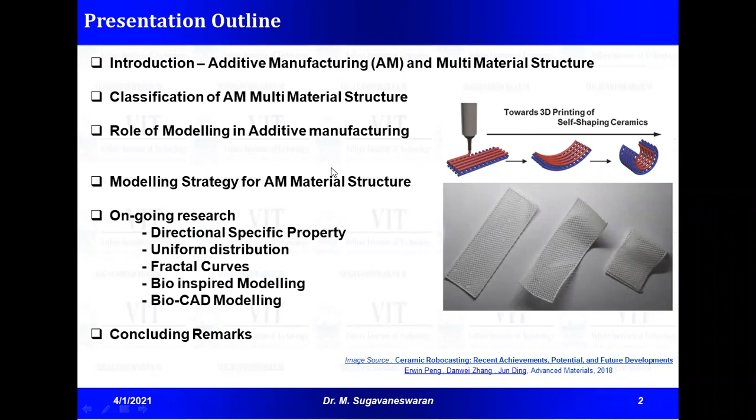So we had many sessions on additive manufacturing. The process is one among the different manufacturing processes which converts a raw material into a desired shape. Most of the traditional manufacturing processes depend on tooling. If we take a formative, subtractive, or additive process, the tooling is a basic component. If we want to change a shape, if we want to change a material, the tooling plays a major role. The tooling could be a mold or die in formative process, tool insert in subtractive process, jigs and fixtures in joining process. This restricts a lot in terms of development of new products, development of new designs.

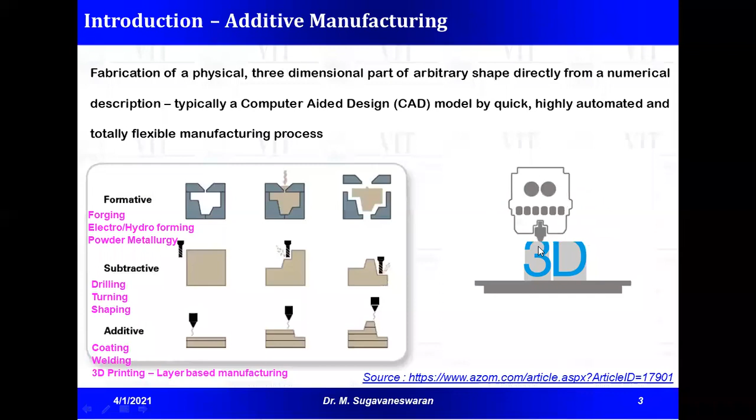This paves a way for another category of manufacturing process, which is independent of tooling activity. One among that is additive manufacturing. As we can see from this animation, we could be able to demonstrate new models without the dependency of tooling activity. And apart from the independence in terms of tooling, we also have the advantage of least wastage because of the additive process, and the process is rapid response to new design. If there is a change in design, the response to the new design is good in additive manufacturing compared to subtractive manufacturing process. But still, there are a few restrictions.

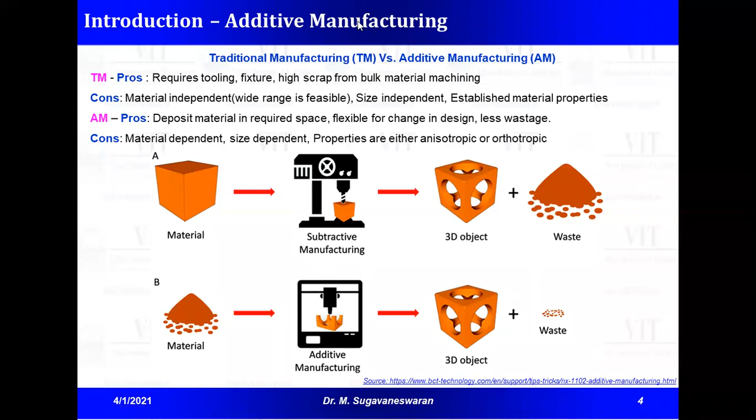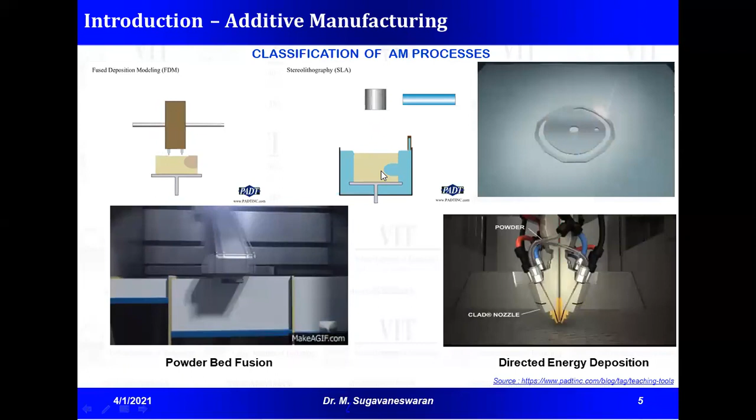But considering this advantage, suitable applications can be explored. Among the additive manufacturing processes, we have different varieties. Few are powder based, few are filament based, some are resin based, some are sheet based. ASTM standards have classified this process into 7 major categories, and these categories are based on the principle in which the materials are joined and also the raw material form.

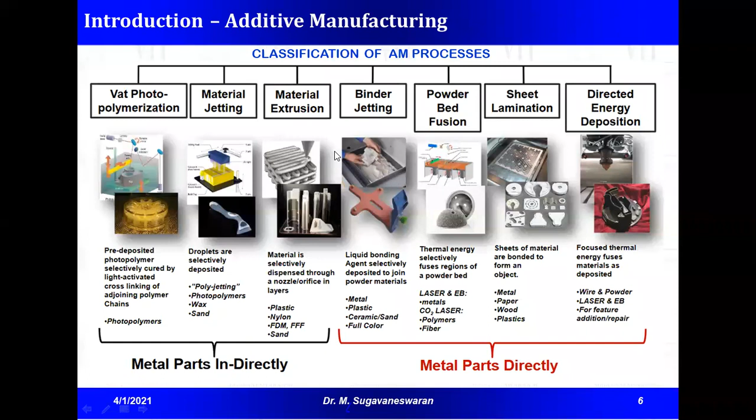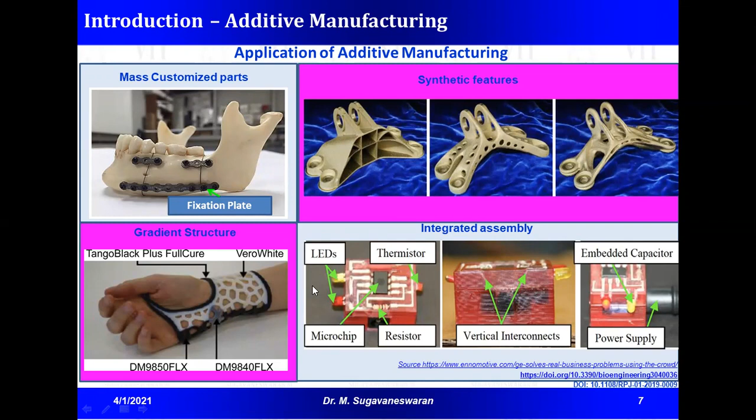So based on this category, we could able to see different processes in the market. And this additive manufacturing process is mostly used for complex, customized, integrated gradient structures. A few examples of additive manufactured components are displayed in this slide. It doesn't mean that these parts are not feasible in traditional manufacturing, but it is difficult to manufacture in traditional manufacturing. Some of the best examples are customized components, synthetic feature components, complex components. This example is complex, customized, with material gradient, and integration of multiple functionality in a single component. So these are some of the well-known applications in commercial aspects, the requirement of additive manufacturing process.

If we look into the multi-material structure, the multi-material structures are majorly classified into two categories: graded type multi-material structure and discrete type multi-material structure. In graded type, the material from one behavior to another behavior will vary gradually. Whereas in discrete type, we could include the secondary material into the primary material in terms of fibers or particulate or flakes. So within the discrete type, we can go for laminated, woven, isotropic, two-dimensional reinforcement, one-dimensional reinforcement.

The fiber can be based on the L by D ratio. It can be a particulate, whisker, or laminate composite.

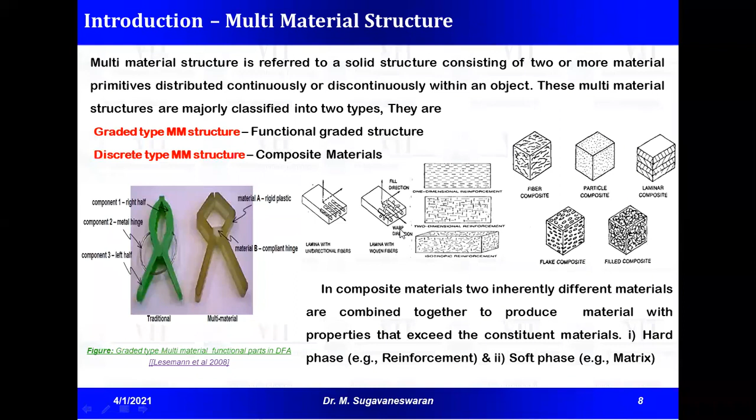Based on the functionality, we are using the multi-material structure in our application. This multi-material structure, apart from composites, the other multi-material structures like graded structures are generally obtained through following processes like mingling of two materials, coating, sandwiching one over another, impregnation, or intermixing the consolidated component, sometimes by using heat and pressure. These are traditionally done through molding, welding, powder metallurgy, coating, and additive manufacturing process.

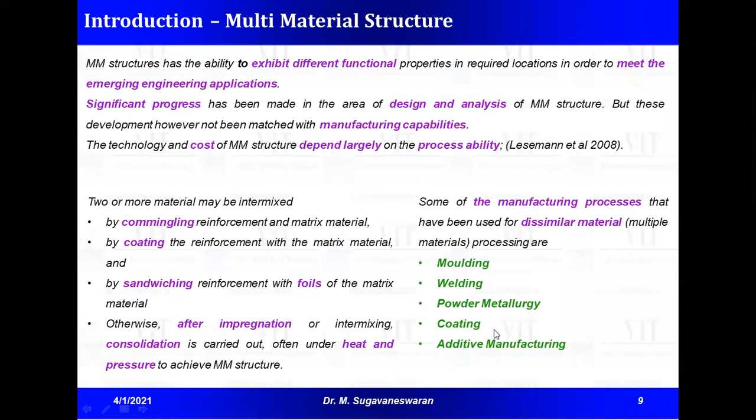In this presentation, my focus would be more on how graded or discrete type additive manufactured structures are made through additive manufacturing process. If we speak specifically to additive manufacturing, the multi-material structures are obtained through additive manufacturing in all three categories: graded type, blended, and infiltrated materials.

In graded type, you can vary the material from one pixel to another pixel, from one layer to another layer. Blended type, material will deposit where the raw material itself is pre-mixed, that is one primary material with a secondary material. In certain cases, it will be infiltrated.

Scaffold or cellular structure will be fabricated using a single material, and this structure and density of the cell is based on the impregnation process what we are going to use and the performance what we are expecting. So either through infiltrating medium, we could make additive manufactured multi-material structure, or through pre-mix condition, we could make additive manufactured structure. In graded structure, that is pixel by pixel, we could control the material deposition.

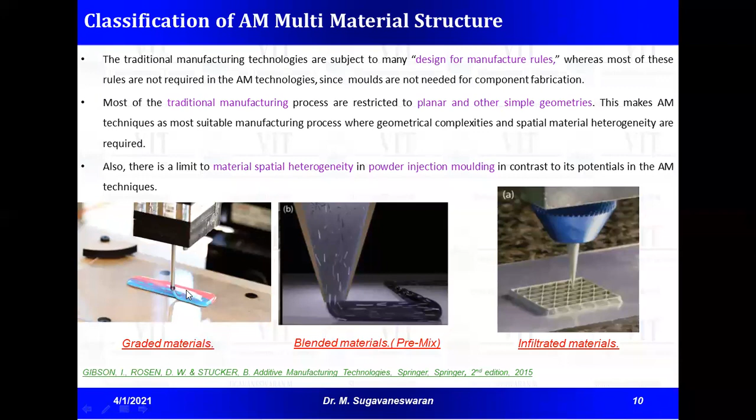This paves a new way of development called mesostructure. Generally, the performance of material is based on the processing condition and its microstructure, whereas in additive manufacturing, the structure can be controlled. If it is in a multi-material condition, the position and orientation of different materials can also be controlled in specific topology, and this topology can be designed in such a way as to obtain a specific property.

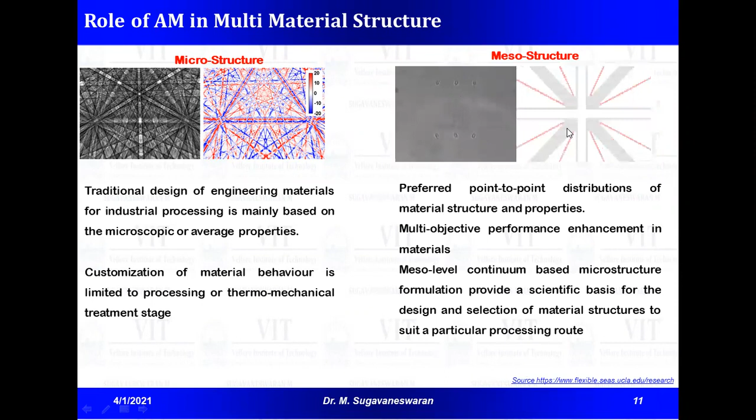So these are some examples of mesostructure, which is very flexible to be manufactured through additive manufacturing process. If we look into the existing literature, as I have mentioned earlier, in all additive manufacturing processes, in all categories like photopolymer, material extrusion, powder bed fusion, DED, sheet lamination, material jetting, binder jetting, through any one of the ways like pre-mix condition, graded condition, or infiltrated condition, the feasibility of achieving multi-material is there, and certain processes have restrictions in terms of material: ceramics, metal, and polymers.

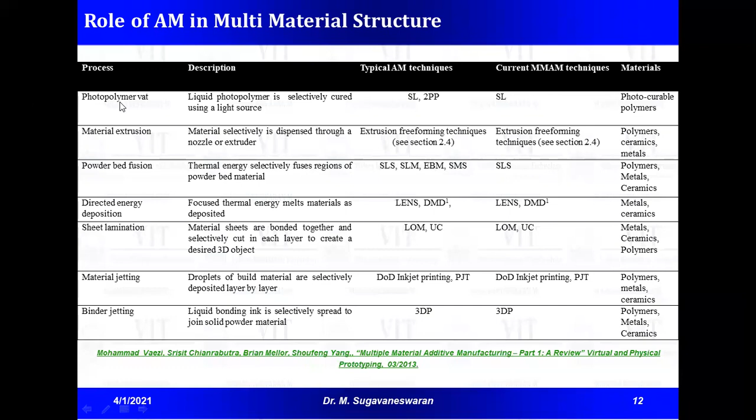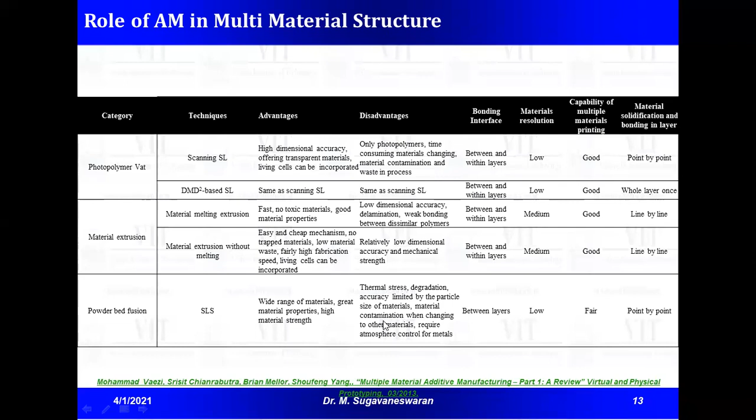If we look into the photopolymer, it is mostly restricted to photocurable polymers. Among these 7 categories, each process has its own advantage and limitation. For example, VAT polymerization is good in accuracy, but it is a time-consuming process, and you have less variety of material. Material extrusion is fast, but dimensional accuracy is not as high as compared to photopolymer VAT. Powder bed fusion, you have a wide variety of material, but there is a restriction in terms of thermal stress, residual stress, and material constraints.

From this, we could observe that by selecting a suitable modeling technique as per our requirement, we could achieve the desired material in the desired pixel. So that is the objective of this presentation.

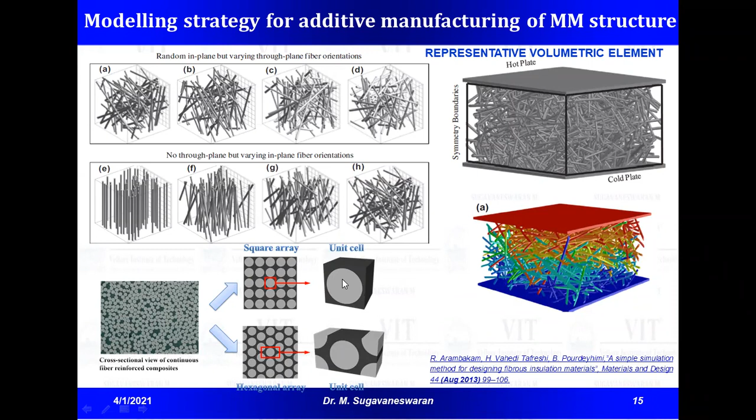Example is shown here. It could be a random generation or based on the external loading, RVE can be repeated in a 2-directional or 3-directional manner. Based on this input, I would like to share some of the research works which we are doing in our lab with respect to modeling for additive manufacturing process, especially with respect to multi-material structure.

So here we are working on fractal curves, fractal surfaces for electronics printing, and also a few applications which require high surface area in a given domain. Bio-inspired structures, modeling of material based on programming, CAD programming — positioning and orientation of secondary material and primary material based on CAD programming. Development of cellular structure, it could be analytical feature-based cellular structure or synthetic structure like gyroid, or nature-inspired structure for bio application, as well as for compressive behavior, toughness behavior, mechanical characterization. We are developing a few structures and testing them for their performance. These are some of the areas which we are working on in our lab.

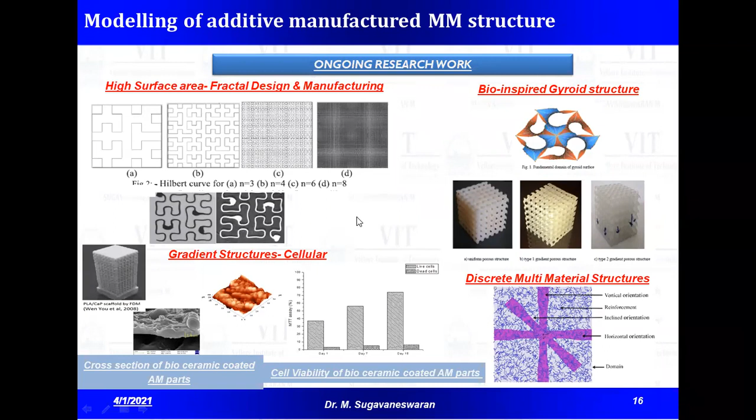The next few slides, we would like to share some of our work with respect to this area. The first one is positioning and orientation of secondary material into the primary material. As I mentioned initially, when we mix two different materials, it can be in a different way — it can be a graded one or a discrete one. Within discrete, we have options for one-directional, two-directional; it could be particulate or fibrous. In this case, we have demonstrated the modeling capability of developing uniformly distributed secondary material into the primary material.

To demonstrate that, a known volume is taken — a square shape known volume is taken with some thickness, and within this volume, the percentage of secondary material required is calculated. Based on the volume and percentage of secondary material, the number of reinforcements, that is number of secondary material, to be generated within a given volume is calculated. This requires two inputs: the first input is volumetric percentage and domain of the volume, and the second one is volume of individual reinforcement.

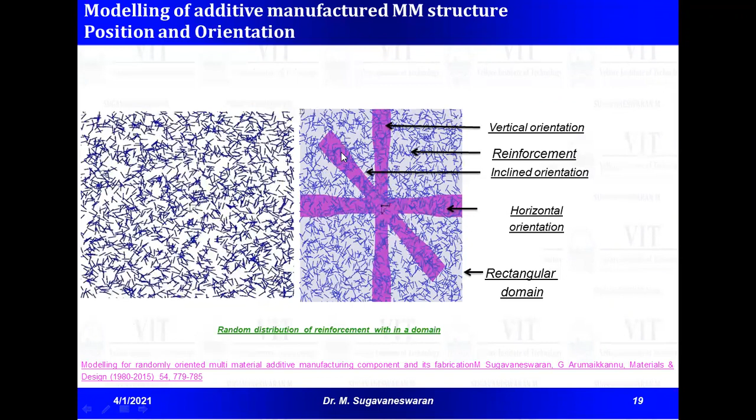...are individually fabricated using a Stratasys Polyjet process, which supports multi-material printing. If we look into the distribution, here I have displayed the distribution of the reinforcement angle, because...

...the randomness of the reinforcement is calculated based on the angle. So for the full 360 degrees...

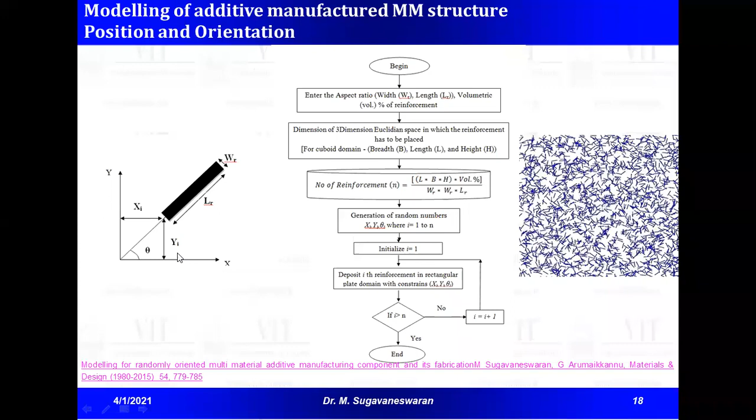...for each 30-degree interval, the number of reinforcements generated is plotted. The mean value is calculated based on the number of reinforcements, and based on this mean, the normal curve is also...

...drawn. So 90 percent of it falls within the 2-sigma level, and it still depends on the random method we are using. In this case, we used the method available in VB script.

Based on this randomness method, the reinforcement is generated randomly, and the distribution falls within the 3-sigma level.

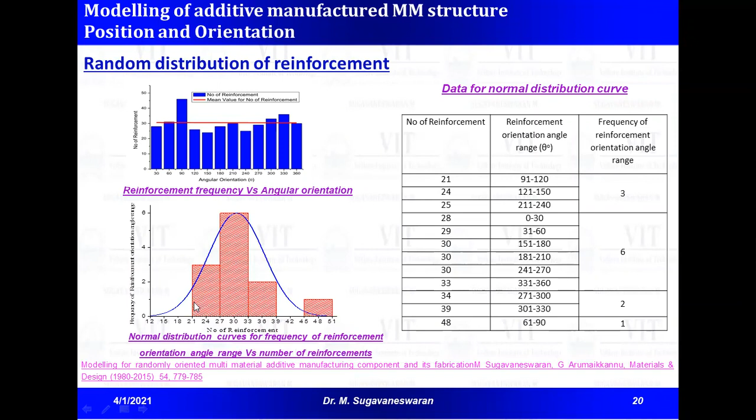...ultimate strength, but if we look at the behavior of the material, it is almost constant. Though we generated the reinforcement randomly, the uniformity is maintained only at the end, because it depends on the crack propagation region and how the reinforcement is positioned with respect to that region.

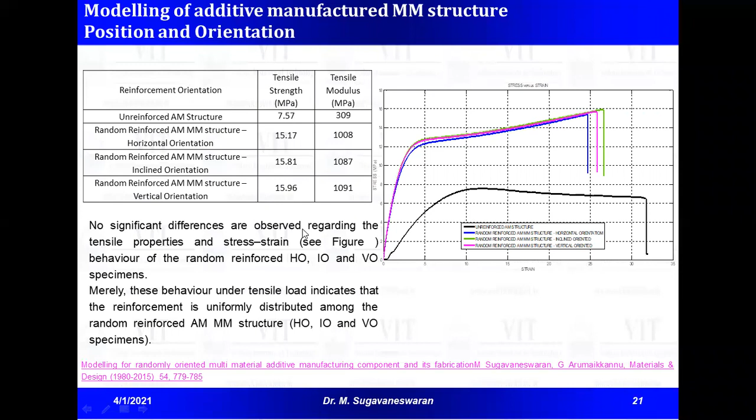So that is about the positioning and orientation of secondary material with primary material based on CAD programming.

We have also tried to place secondary material within the primary material based on different loading conditions. For this, we took a reference from classical lamination theory, which is generally used for composite materials.

If we look into the composite material, the positioning and layup sequence help us understand the behavior of the material, whether it has bending resistance, twisting resistance, or superior strength at the outermost layer.

This can be designed using the CLT relation, the classical lamination theory relation. Based on this relationship, the A matrix represents axial loading, the D matrix represents moment, and the B matrix represents the coupling between axial and moment.

Certain terms in this ABD matrix can be made zero, and with certain layup sequences, we could also achieve symmetric conditions in the laminate. That is, above the mid-axis and below the mid-axis, we could achieve a symmetric condition.

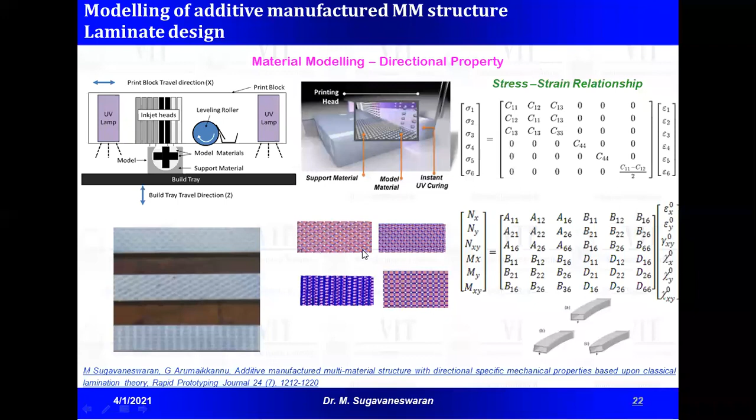Based on this CLT relationship, the secondary material is designed into the primary material, and this structure, as well as the previous structure I discussed, is fabricated through a polyjet three-dimensional printing process from Stratasys, which deposits a droplet of photopolymer that is cured immediately with a UV lamp, layer by layer, using an inkjet ejection mechanism to eject multiple materials within a layer. That is one uniqueness of this process.

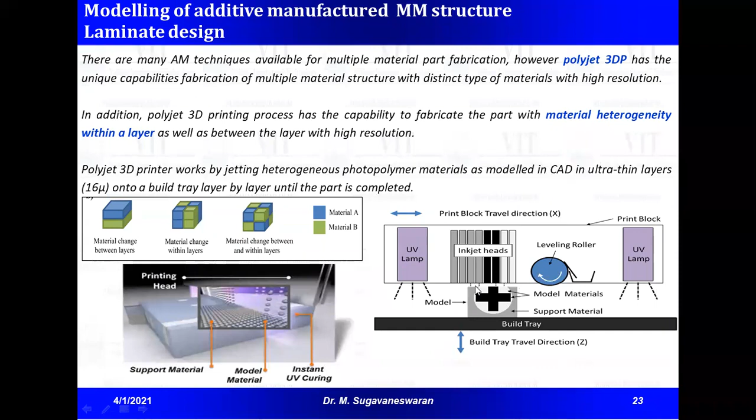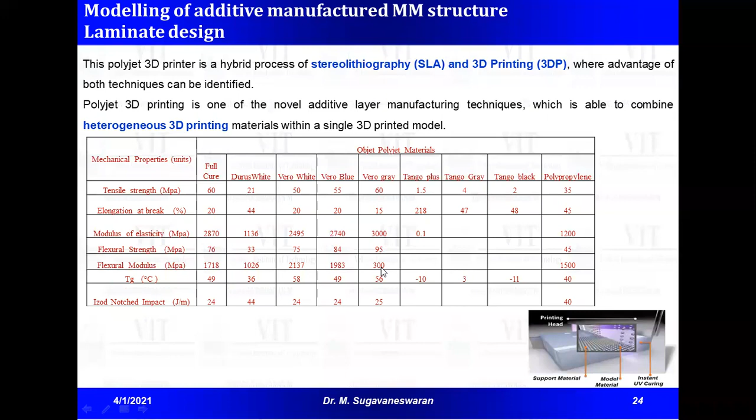Based on the CLT relationship, a few stacking sequences are considered. The first one is unidirectional. All three categories are unidirectional, but in longitudinal condition. 3 represents 3 layers, and S represents symmetric of 3, so totally 6 layers. Above the axis it is 3, below the axis it is 3.

And 45, where all the secondary material is placed with the primary material at 45-degree inclination. 90 is where the reinforcement is placed at 90 degrees in all 6 layers.

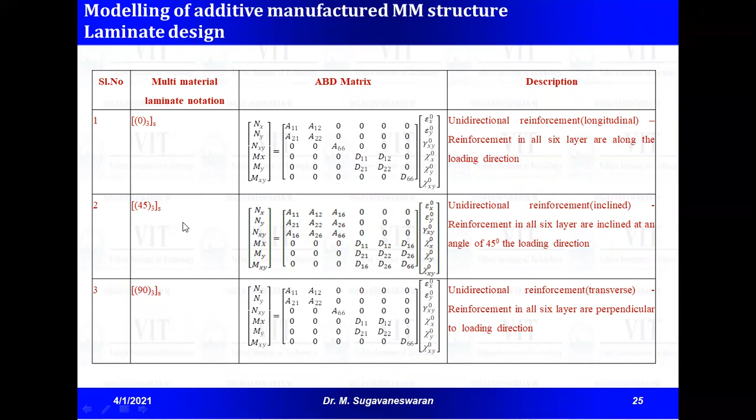That is bidirectional - from one layer to another layer you have a variable orientation. In the previous case, all layers had the same orientation of secondary material. Whereas in bidirectional, within each layer we could change the direction.

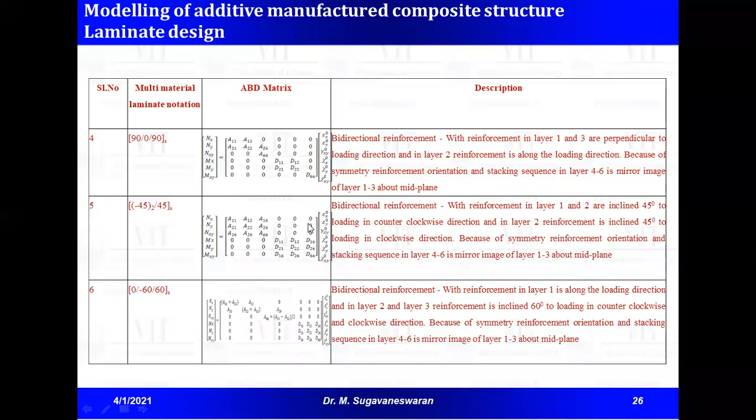Again, the relationship is displayed in this CLT equation. The last one is quasi-isotropic, where we could achieve a transversely isotropic condition. The CLT guidelines help us design the secondary material from a primary material through a CAD model.

The unidirectional component stress strain behavior is shown here. It is known that in tensile loading, if the reinforcement - the high strength material - is along the loading direction, we get the best strength. But in the transverse direction, there is delamination which occurs along the matrix.

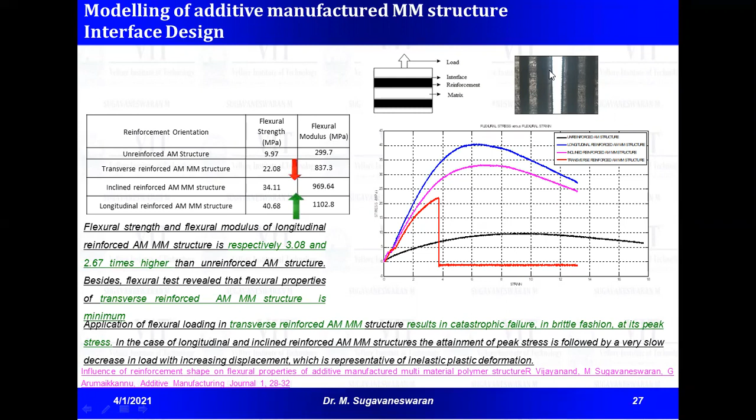If we look into the fractured specimen, we can observe that the load doesn't get transferred to the high strength material. The reason is, as we print a component layer by layer, between the layers we have a weak interface - that is most common in any additively manufactured component. Along the z-axis, the strength will be less, and this results in catastrophic failure in the transverse condition case. But later, I would like to show an interesting result of how we have eliminated or improved this behavior in the unidirectional case.

In the multidirectional case, twisting - that is, in-plane and out-of-plane curvature, in-plane deformation and out-of-plane deformation - can be controlled by proper alignment of the secondary material within the primary material. So twisting, bending, or a combination of twisting and bending, can be controlled by choosing a proper alignment of the secondary material within the primary material.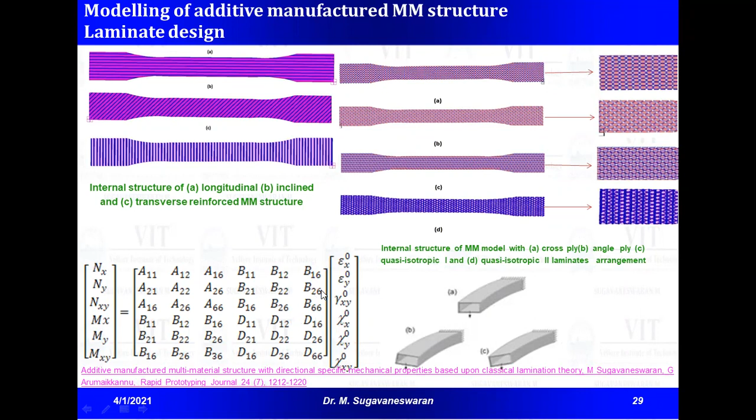If we look into the fractured region of two bidirectional laminates, on top it is cross ply, and on the bottom it is quasi-isotropic condition. We could observe 6 layers - the top 3 layers and the bottom 3 layers.

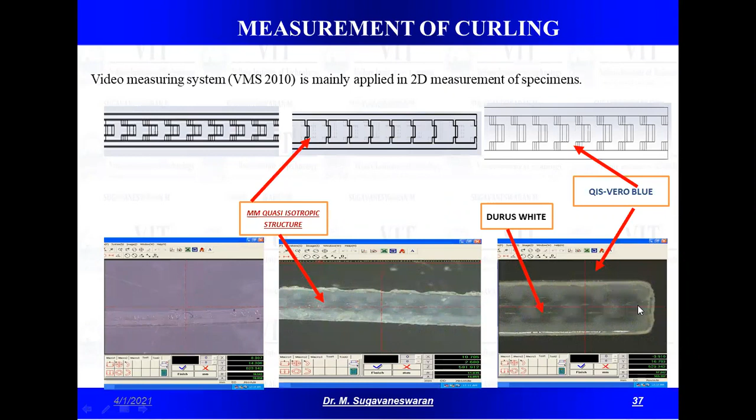This is a printed component of thin feature based on quasi-isotropic condition. In the enlarged image, we could see the multi-material condition. The dimensional combination shown here includes different width, length, and thickness combinations for the purpose of experimentation. We could observe in-plane distortion as well as out-of-plane distortion.

As we have a specific property, since we are designing the material with a specific orientation, the comparison between the multi-material structure - though it is not an optimized one, we have taken directly the quasi-isotropic - is not varied, because at the bottom the Young's modulus is different from the top. So if we look into the curling behavior of thin features, though it is not an optimized condition, with the help of quasi-isotropic, which has high resistance to bending at the top and bottommost layer, that is what we observed even in finite element analysis.

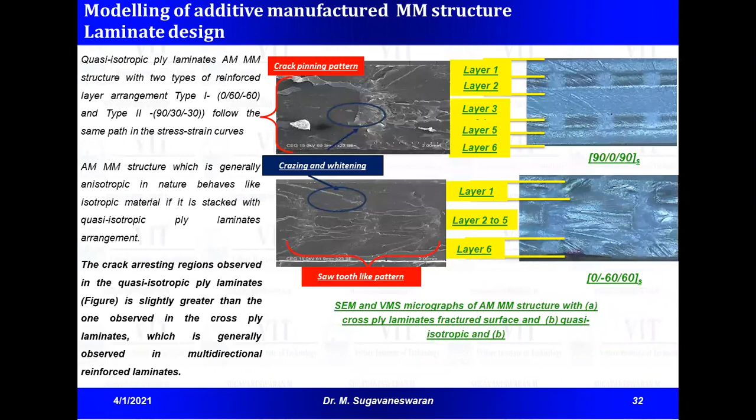As we look into the ply-wise stress behavior of a material with respect to thickness, the quasi-isotropic condition has high strength and high resistance to bending load. This is for a bending load condition. In quasi-isotropic condition, the resistance is more at the outermost layer. These three graphs show the stress behavior across the thickness for a bending load condition.

The first graph is for angle ply, the second one is for cross ply, and the third one is for quasi-isotropic ply. As I mentioned, the blue color line represents shear load. In cross ply laminate, we do not have coupling, so the shear load is completely zero.

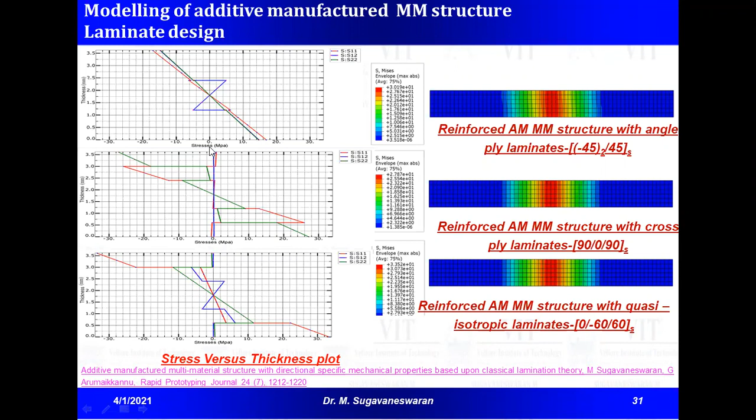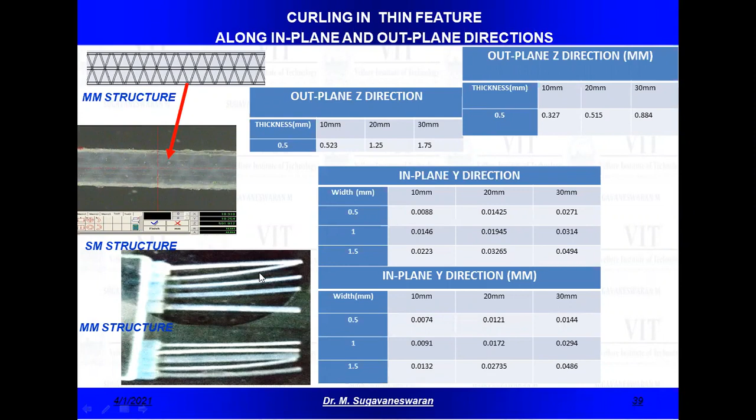So now we are further working on calculating, through an analytical method, the individual elastic modulus of a layer, and accordingly varying the composition of primary material and secondary material across the thickness to control the distortion. This anti-curling behavior has to be implemented so that even after removal of the component, it maintains the proper position without any deformation.

So this type of structure will play a major role, especially in compliant mechanism. Nowadays we are seeing a lot of application of additive manufacturing in compliant mechanism, topology optimization, thin structure, and cellular structure fabrication. So we believe that optimizing the material distribution from bottom to top based on the variable elastic modulus, we could restrict the distortion in thin features.

So this is one example of a thin feature, a turbine blade component, where once it gets removed from support, it tends to curl automatically because of heterogeneous behavior.

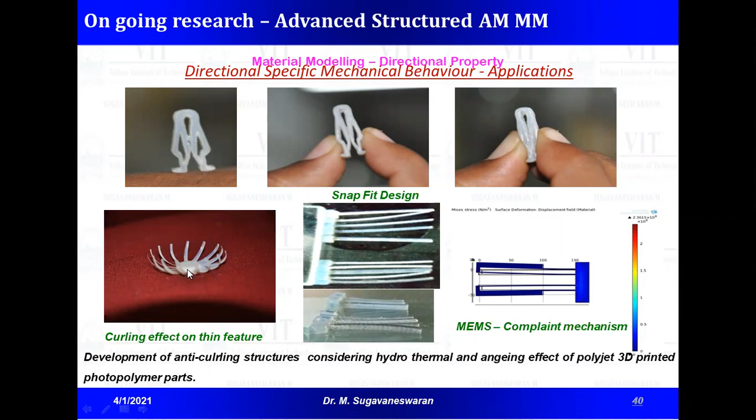The other part of the presentation is, as I have mentioned earlier, in transverse loading we could see that the load doesn't get transferred from the matrix, the softer material, to the harder material, right?

So as we are designing from CAD, we took advantage of mechanical bonding, and the interface between the primary structure with respect to the secondary structure is redesigned. Instead of a planar interface, it is redesigned with a corrugated interface, as we observe from nature. So the planar interface is redesigned into a corrugated interface, and this is subjected to bending.

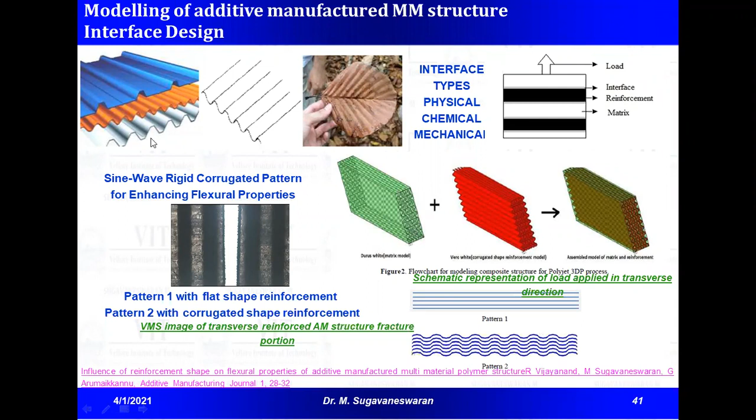Whatever image is displayed here is a failure of a component in transverse loading. So as corrugated structures are advisable for bending loading, the planar interface is redesigned with a corrugated interface, and this was printed using the same PolyJet three-dimensional printing machine.

The stress-strain behavior of three combinations: first without the secondary material, only with the primary material, the maximum strength is around nearby 10 megapascal.

Whereas if we go for mixing primary material with secondary material, there are 6 layers. As it is subjected to bending load, we could observe the peaks, that is layer by layer fracture of all 6 layers, and this strength is less than the strength we observe for pure virgin material.

Whereas in the corrugated structure, we could achieve a drastic increase from 10 megapascal to 25 megapascal, and this layer-by-layer fracture problem is also addressed by means of this corrugated structure, though it is not fixed at both ends.

We could report the result until this part.

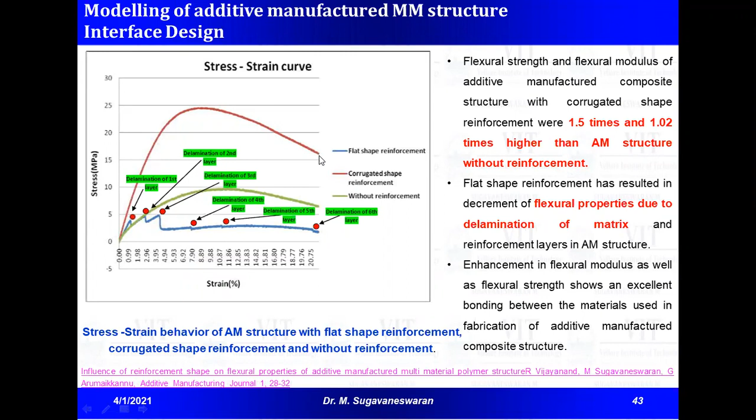So the interface problem, based on the CAD design, the multi-material structure interface can also be designed for additive manufacturing, which is exclusively for multi-material fabricated through additive manufacturing structure.

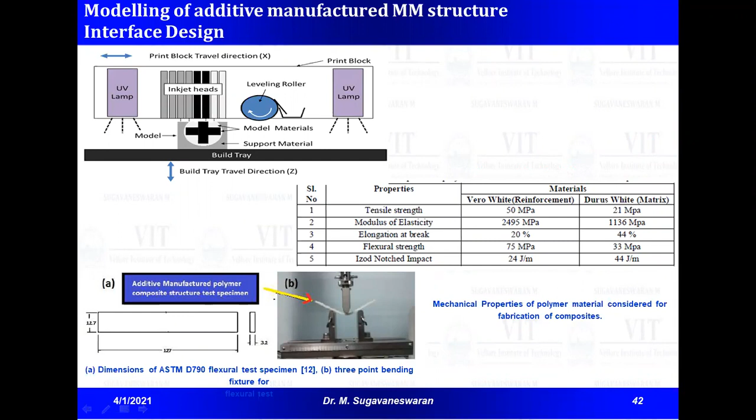And one more possible application of the stacking sequence could be soft robotics. Here you can see the application of laminate orientation. For example, in this case, the part is made through a smart material, and apart from the material behavior, the structure is also playing a major role.

So as reported, the component is made of square cellular cavity, that is the layup is like crisscross or cross ply. Here it is an inclined diagonal cavity. Just by changing the layup direction, we could control the distortion behavior of the material, and this distortion could be used according to our application.

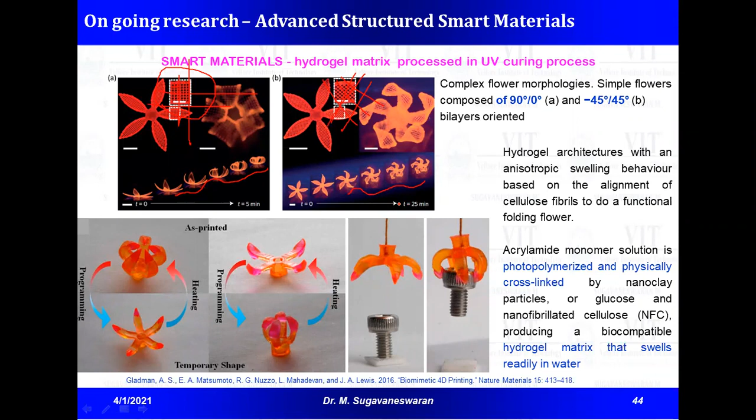So that is another significant application of the positioning and orientation of material, which could be a cellular material or embedded secondary material into a primary category.

And one more case study which we have completed working on in our lab is prosthetics fabrication. In this case, it is specific to ocular prosthetics. So this ocular prosthetic is also called a glass eye.

These glass eyes are used for patients who have glaucoma diseases or who got an injury. It is replaced by this cosmetic eye, though it doesn't have any functionality for cosmetic purpose, and it also serves certain functionality like dust prevention, accumulation of tears, and maintaining proper distance between the eyelid after surgery. So this could be a custom shell or a customized shell.

Stock shells are available in the market, but they may not fit properly, as you can see from the first figure. Whereas with the customized shell, you cannot identify which is the original and which is the customized one, and this customized surface will fit exactly to the profile of your eyeball.

So that is the purpose of customization, but both are cosmetic. One is stock shell, another one is customized. One is the normal shell, and the other one is a customized shell.

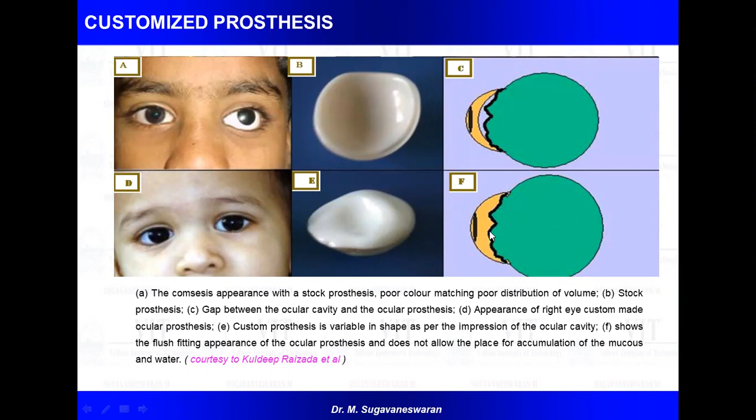In this case, we have taken the additive manufacturing route. By using a CT scan, the cavity profile is measured, and based on the cavity profile, the three-dimensional CAD model is generated. This is also fabricated through polyjet three-dimensional printing process, and the final implanted prosthetics you can see from this figure. So that is like image processing.

That is BioCAD modeling, where we take an image and convert it into a CAD model for application. The functionality of this customized shell was evaluated by using IPD measurement, that is interpupil distance, between the center position to your pupil.

Generally, the normal shell may not have a proper IPD distance. It may vary as you move your eye left and right. So the normal eye will move properly, whereas the stock shell glass eye may not move.

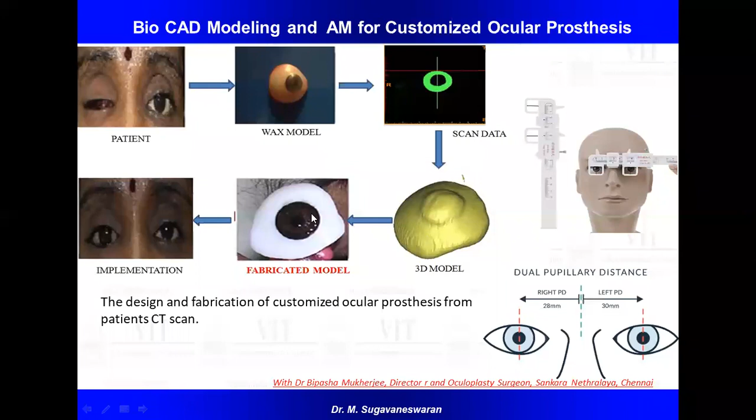If you want to have better motility, few patients are going for peg implant. That is, they'll have a peg which gets attached into the ball. This is done through surgery, whereas through additive manufacturing process, we could replicate that structure.

The IPD measurement for a few trials is displayed here, and the oculist is also satisfied. The most important advantage is that it is patient specific. And if they lose the data, the patient need not visit the clinic again, since it is stored as a CAD model.

Rework is also reduced as you go from wax to mold to acrylic. The precision is not high, so we could not observe such good IPD movement, though it is customized, whereas in additive manufacturing we could achieve the satisfactory result: better motility without the peg implant, and less dependence on skilled labor.

If we take our country, we have a shortage of prosthetics, exclusively for ocular prosthetics. At the bottom, I have displayed the market requirement from 2019 to 2027 for different continents.

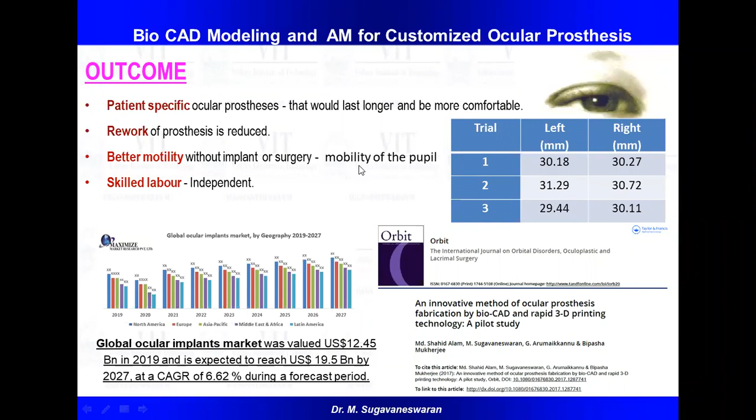So these are a few benefits apart from the customization and technology they could achieve for this particular process. Overall, in traditional manufacturing process, the performance and behavior of a material is completely dependent on the processing condition, whereas in additive manufacturing, the performance and behavior is controlled based on 3M: machine capacity, material capability, and modeling capability.

The work I have shared from our lab is mostly relevant to modeling, with the modeling technique, how we could achieve desired property. This unique output can be explored for new applications or for some of the existing applications.

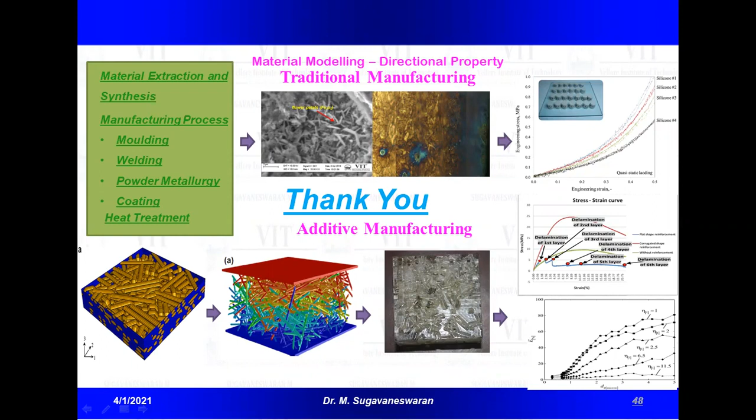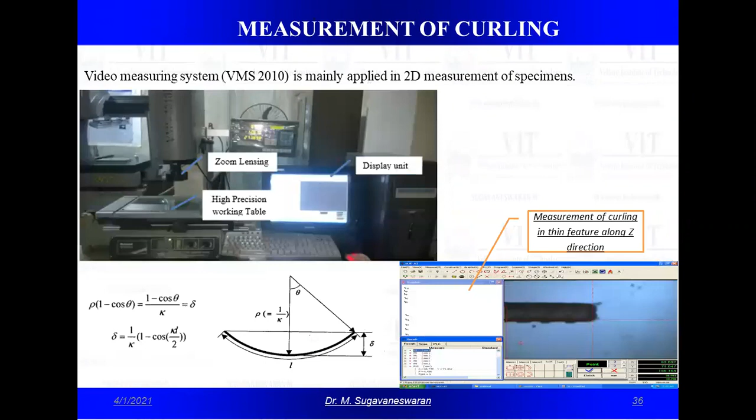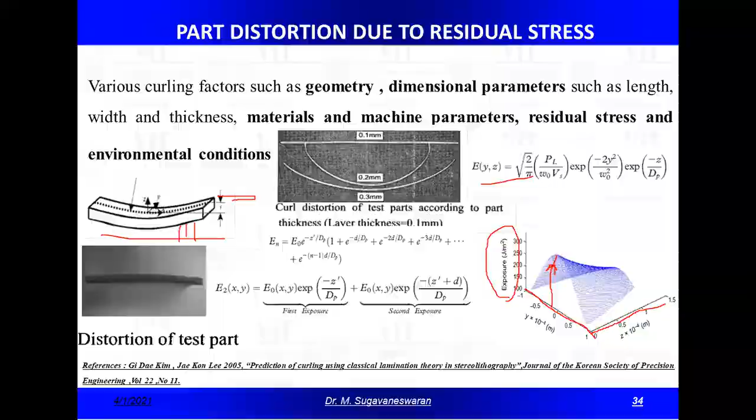I have a question on slide 15 of your presentation, where I think you had shown some structures, specifically they looked like fibers oriented in a specific direction. I wanted to know what the size of those fibers are. I wanted to know whether these kinds of fibers can be grown on electronic thin films where we require nanowires. Is that something possible through additive manufacturing? What is your thought on that?

Yes, Prabhu. So the fiber diameter, whatever I have displayed, is around 0.5 mm. It is based on the minimum resolution which we could report from the machine. Less than 0.5, we are unable to achieve the proper resolution. With respect to your question on micro level, maybe with this machine it may not be feasible, but a few researchers are working exclusively on micro additive manufacturing. So maybe we could look into the minimum resolution we can go for.

Okay, thank you. Thank you.

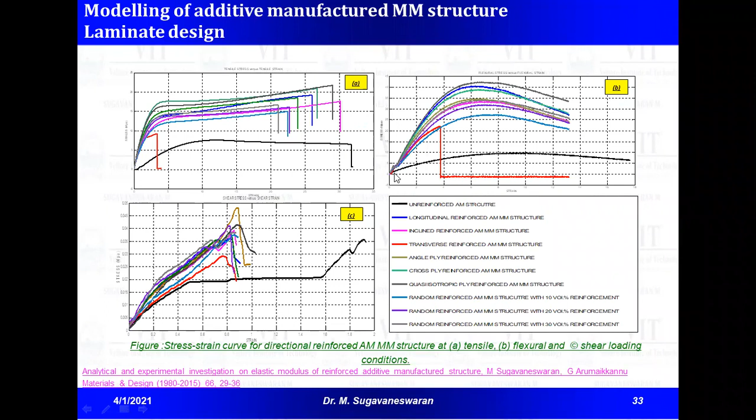Any other questions? Sir, actually, you mentioned you are able to print smart materials also using these methods, right?

Yes, sir. So for example, nitinol—this transformation is dependent on temperature. How would you be able to control temperature precisely if you make a smart actuator out of this? In this presentation, the material I have shown is photopolymer resin, not metal, but researchers are working on nitinol also. I haven't worked on metal smart materials as of now, but I could see research work, not in thin structure, maybe in bulk structure. A few publications are available, but the material reported in the presentation is hydrogel and photopolymer resins.

So can this be extended to nitinol? That would be the next question. Yes, I went through a few articles on nitinol also. Okay, great. Thank you.